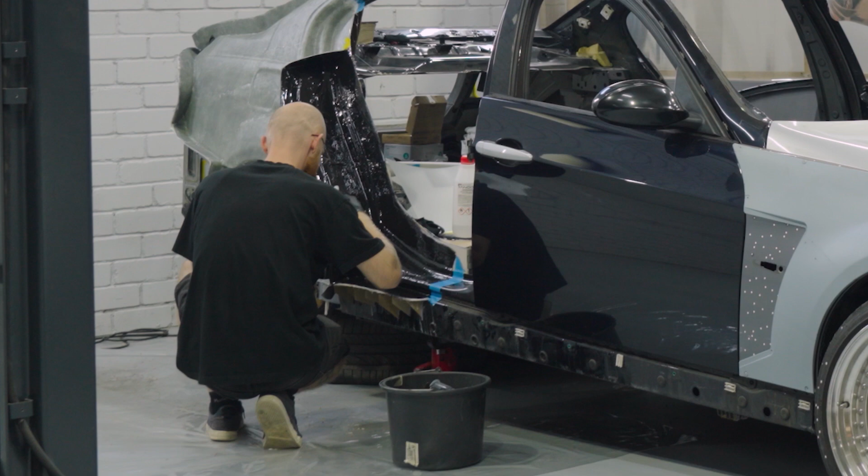Hello again. Every time when I give you an update about our E46 drift build, we talk about 3D scanners, and we are going to do that again today.

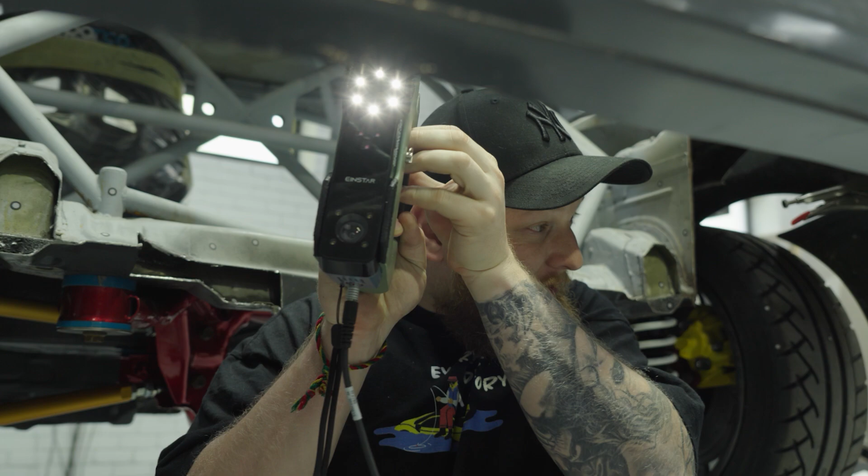But before that, I want to show you what we did before when we tried Einstar and EinScan HX, when we compared them. I told you that we are going to build the crash bars for the front end and for the rear end.

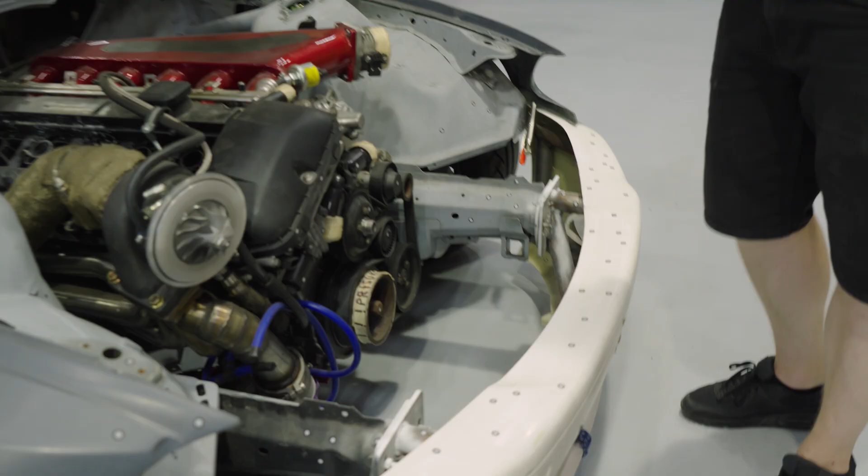We finally got the front end. Sorry, fiberglass hood is not so light as carbon fiber or Kevlar. We are not going to build from the fiberglass.

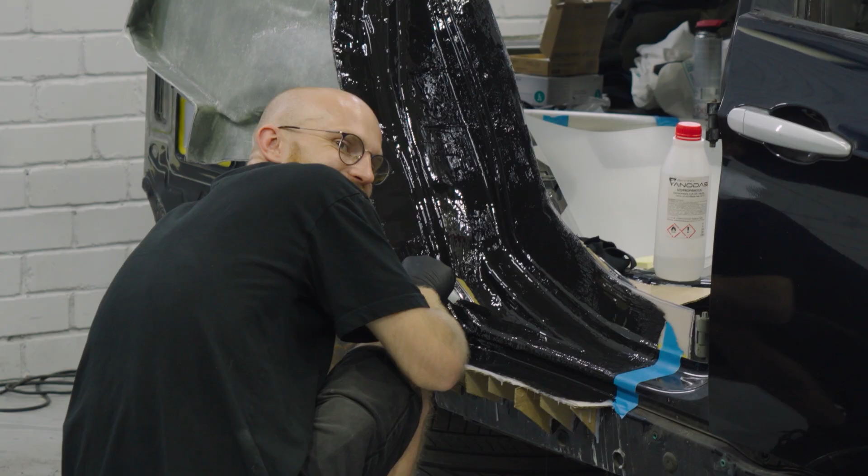So as you can see, we have the crash bar. Right now the bumper is not fixed yet. It's gonna be. We're still waiting for the brackets for the headlights, but that will come back later.

Rokas left some of his precious duct tape. It was a real pleasure to work because we saved lots of time not having to measure and do it again and again.

We just simply did whole design using CAD software. Rokas put it all together, welded it, and it fit like a glove. But this one is a simple one.

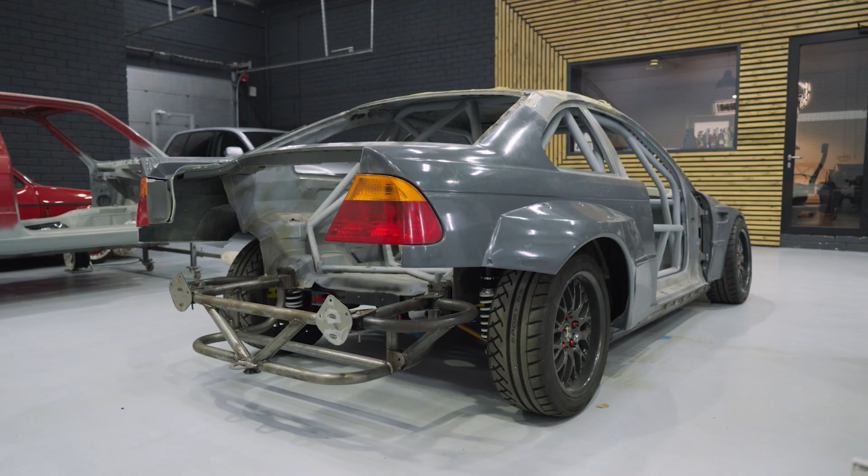Let's talk about rear end. As I mentioned, we have built the rear crash bar. We saw similar designs from other Lithuanian drifters and etc. What we're doing is nothing that we invented. We're just trying to take the ideas of what's already working and put it together.

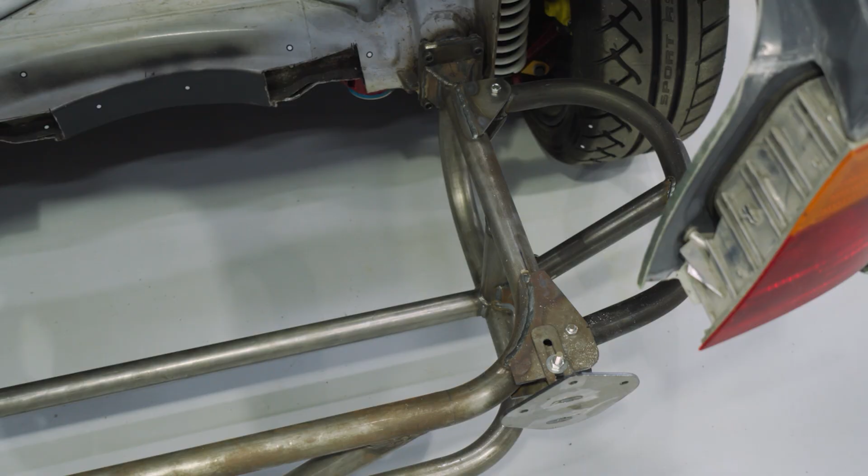So that's why we have detachable sides for the crash bar. In case you hit the wall, you can just remove them instead of the whole crash bar.

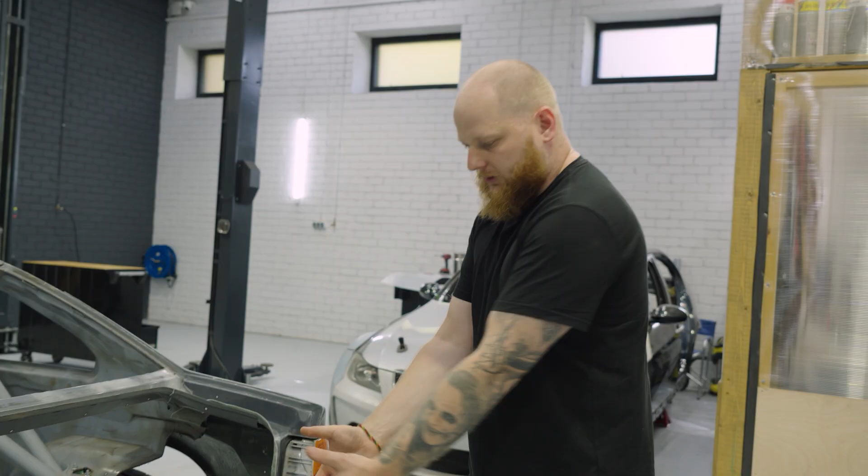Additionally, what was required for this E46, we needed to put the rear part of the rear end. We built these adjustable parts so you can change how much you want it out, depending on different fabricated fiberglass or maybe not parts. So yeah, we have this part.

What's still missing is the brackets for the fuel cell. We already have it, we scanned everything. We used CAD software to design everything. We got the measurements of the fuel cell, and it's gonna be over here.

Additionally, if you remember, we scanned the rear firewall, so the bracket for the radiator was designed. It was a special design for that specific radiator that the owner had, so we don't have to cut or adjust anything. We're just going to bolt it to the top part of the rear end and to the bottom, and that's it. So yeah, but for today there's something else what we have to do.

Let's take a look inside what we are going to build today. So can you hold the doors? Oh no, never mind, I'm just going to put them over here.

Practical, everyday, daily car should have doors like that.

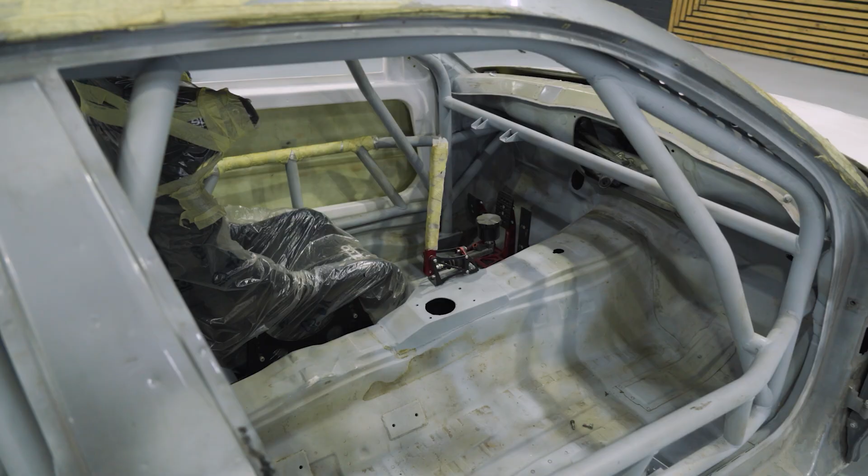What we are going to scan today is the inner tunnel of the E46. And why do we need that? Because this car is gonna use the ECU Master EMU Black ECU, PMU of ECU Master.

Additionally, it's gonna use a CAN keypad next to the seat. Nothing is gonna be attached to the dashboard, only the ADU from ECU Master. Lots of ECU Master parts gonna be used.

Today what we're gonna do is we're going to scan the tunnel, and we are going to prepare the brackets for ECU, for PMU, and for the CAN keypad.

Definitely, there are brackets available for ECU and PMU. I saw a few designs over the internet, but what we want to do is make it fit like a glove to the tunnel, so every single hole is flush, and we don't have to grind anything or prepare. We're just going to put it to the tunnel, and that's it.

Also for the CAN keypad, I'm not sure, I didn't find any. We could use some universal ones, but we don't want to do that. We want to make it flush and sit properly and tight, so when you're drifting it's not gonna go anywhere.

But before we start with scanning, let's take a look what we got today. As you remember, we are huge 3D scanner users, everyday users, and I mentioned that multiple times today. You know that we have our Einstar scanner.

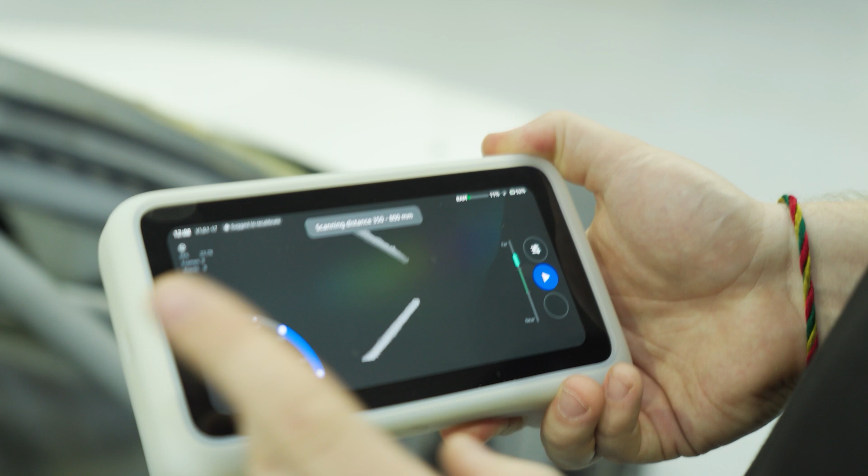I'm going to start with Vega. I'm not going to calibrate texture right now because we don't need that. It's definitely more usable for digital use cases, but since we need geometry, I'm not going to use that. What I'm going to do is select the distance between 350 and 600, so it doesn't get too much data that I don't need, like the roll cage, etc. In that case, it's better to track, and the scanner doesn't have to think so much about where to track.

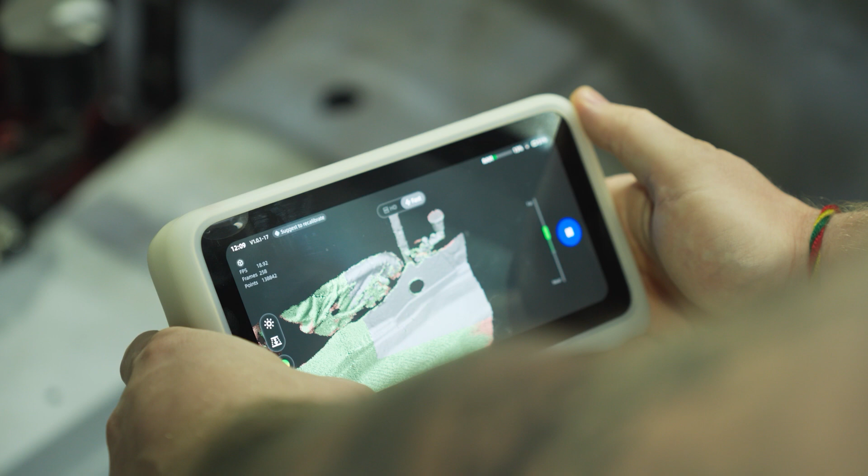So let's try. As you can see, it's quite easy to scan, and it's easy to see the quality. The green part shows me and indicates that there is more than enough scan data to create the mesh, and the tracking is quite good.

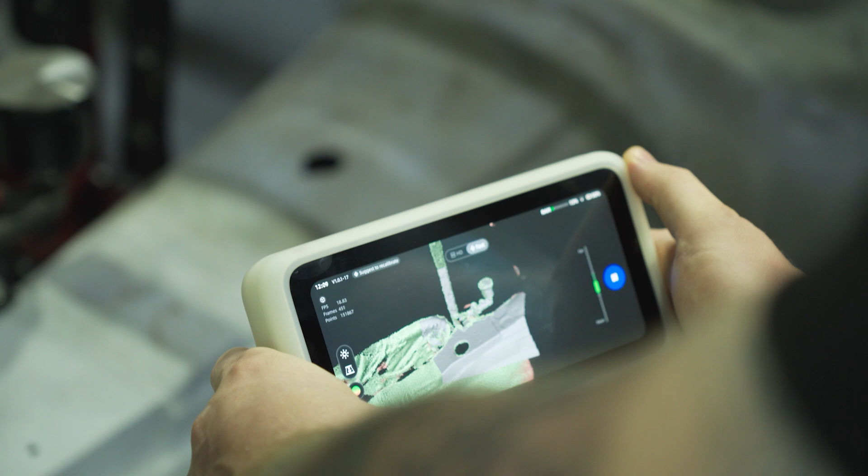I'm definitely going to scan more than I need, just to try it, because the tunnel part is more than enough for our project. But when you have something new, you always want to try and see the possibilities. Also, we want to compare with the Miraco to see the differences in scanning between both of them.

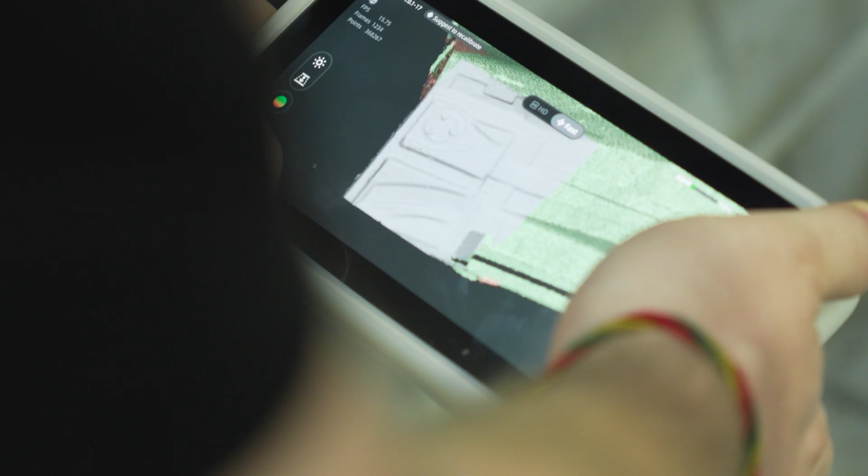Working with an all-in-one scanner is definitely easier than working with a tethered one that requires a PC or Mac, because now I can simply look at the LCD and that's it, and work. It helps to save time.

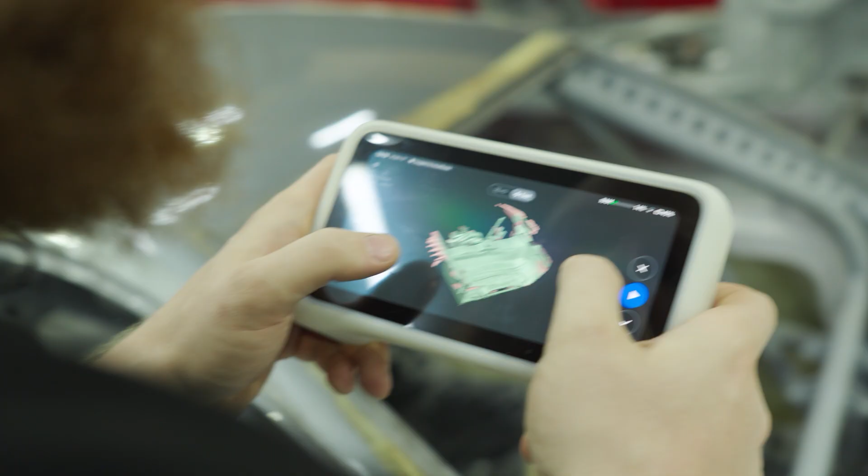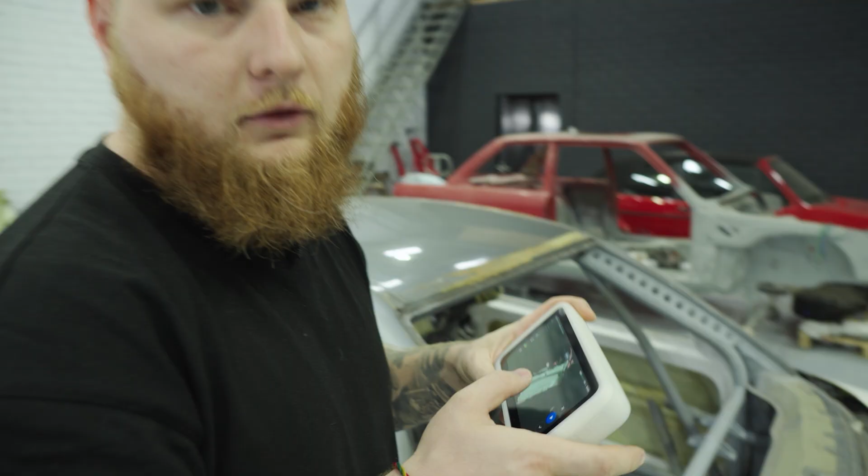Okay, I think that's enough data. As you can see, the green parts are what we are going to use. I can scan additionally on the other side if needed. What do you think, should I? I think I can do that off camera without you, because you're standing and interfering with me while I'm scanning. I'll continue without you.

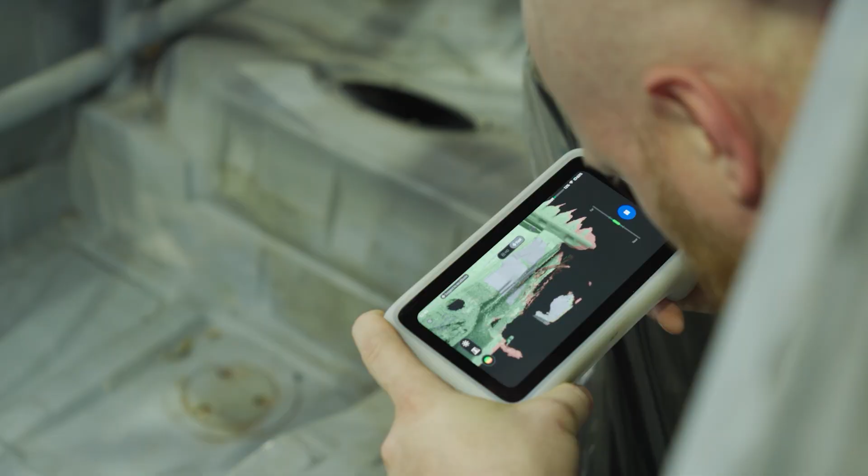Okay, now I have enough data and I'm happy because I have both sides and the engineer can work on it. I can press finish. It's going to finish the scan.

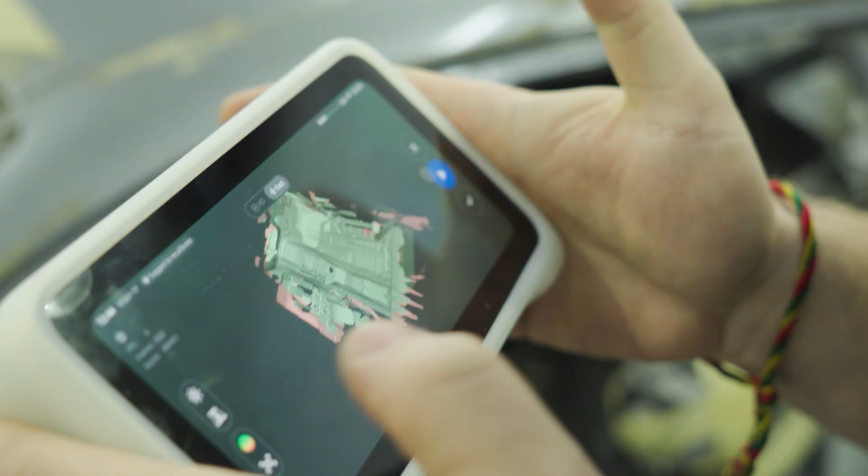I still need to get used to this because I'm always editing the scans on the Mac, but you can do that here. It's definitely easier to work on PC because you have your mouse and your huge monitor. But still, before the meshing, you can simply remove some garbage. I'm not a big fan of playing with small screens - I prefer bigger ones. Big screens, big engines, and big power.

Okay, I pressed complete, so it's going to remove the data that I wanted to remove. So we got our scan edited. It still has some floating stuff, but I'm not going to mess around with it. I'm going to use one-click mesh, it's faster. I definitely can choose my own parameters for the mesh, but let's give it a try for fast reconstruction.

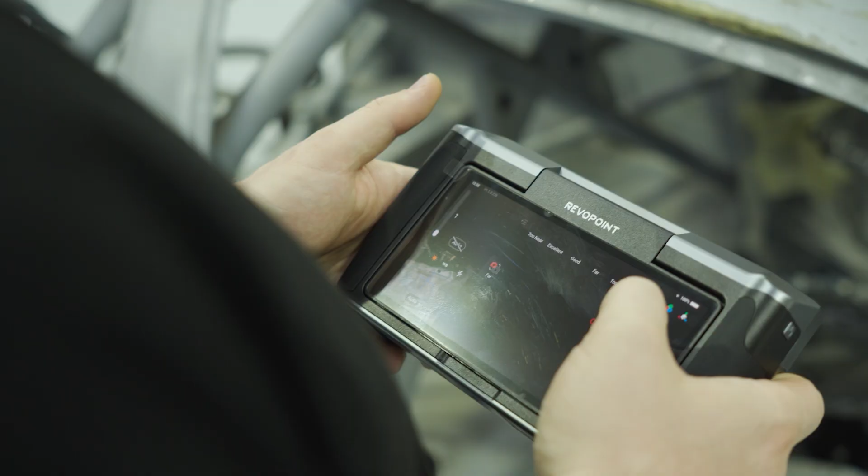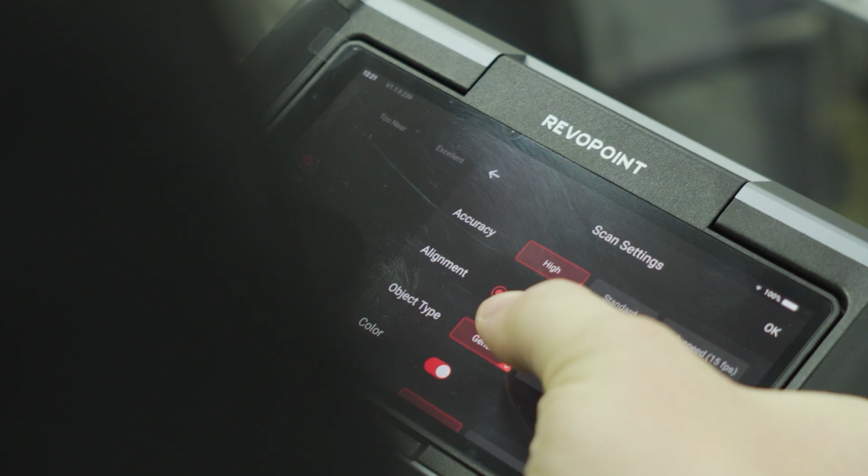Now, while the mesh is being generated, I'm going to take the Miracle and we'll see how it compares when we're talking about the scanning. I'll try to use the same setup, same distance, 250. I hate sliders like that because I have huge fingers, so it's hard for me to play with them and it's a bit laggy. Come on, you can do it. Oh, 51, 51. Far mode, auto here. I want to close it, and I'm going to disable texture also - align by feature, general type, no color please. Okay, let's give it a shot.

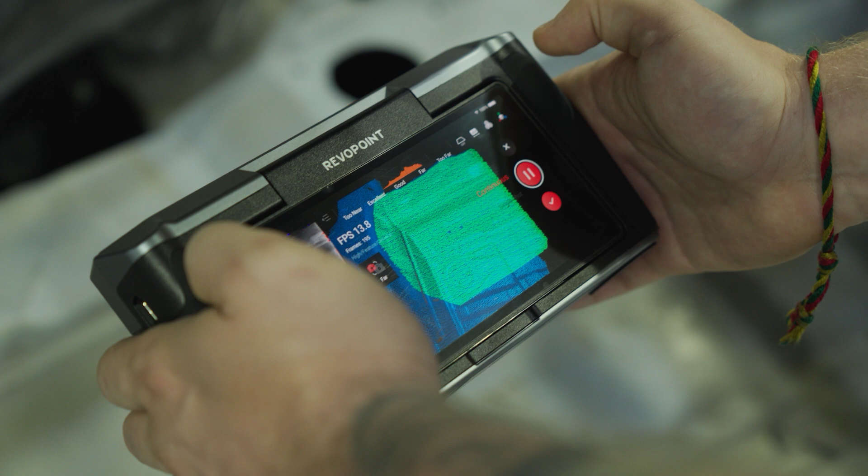What I'm already missing is a data quality indicator. I think you can understand if you have enough data, if it's more blue or less blue, but it's more convenient to have red and green indication, so you can try again.

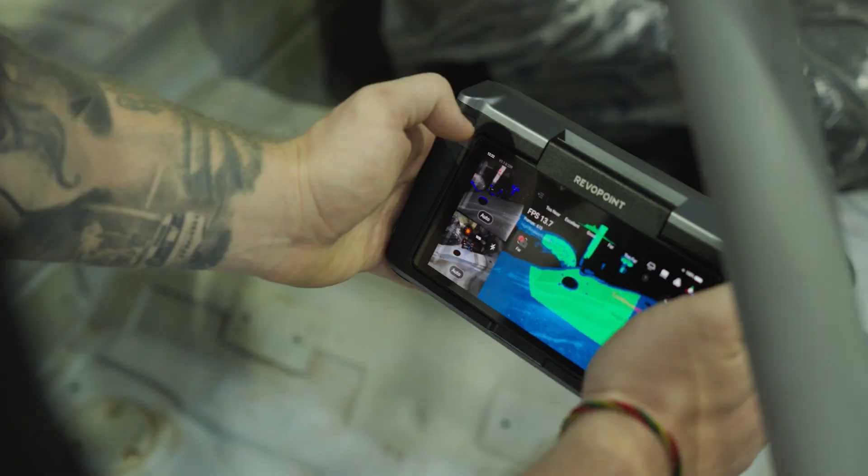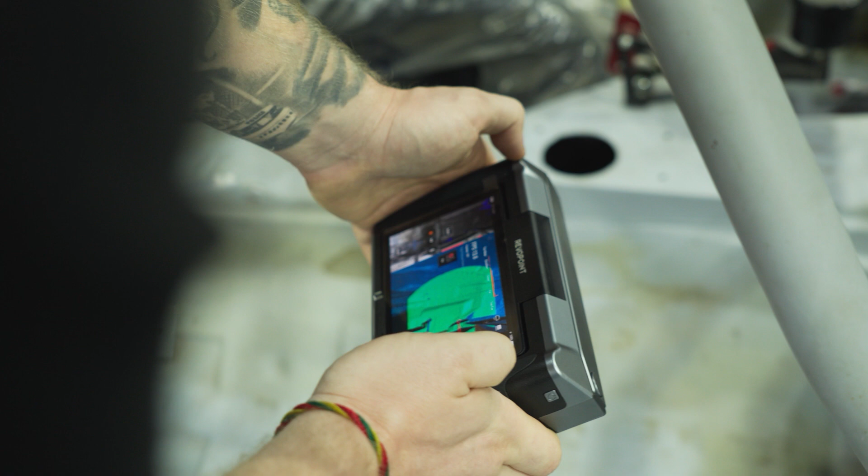It definitely has some trouble capturing black objects, because the handbrake is still uncaptured. As you can see, it gets some parts and that's it. We'll see how it does in the darker spots. But yeah, I'm really missing the data quality indicator. I don't know, should I scan more or not?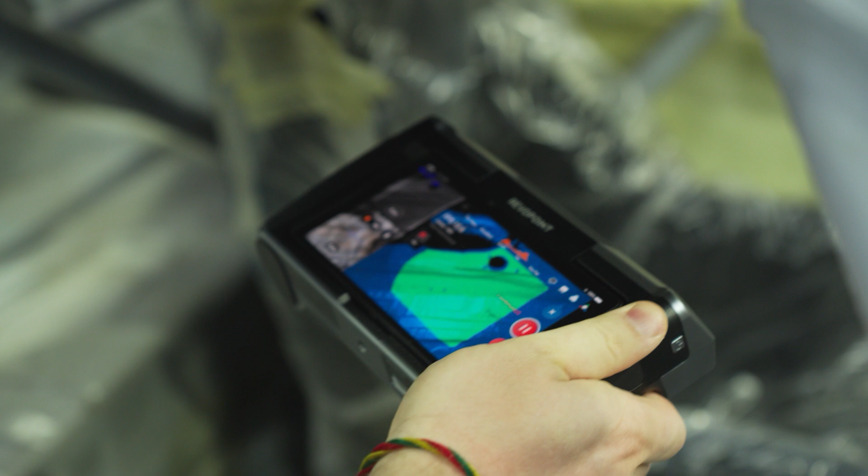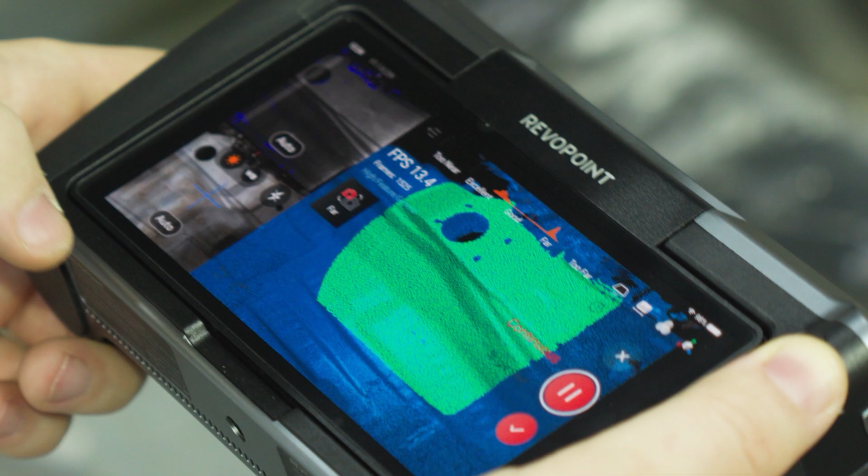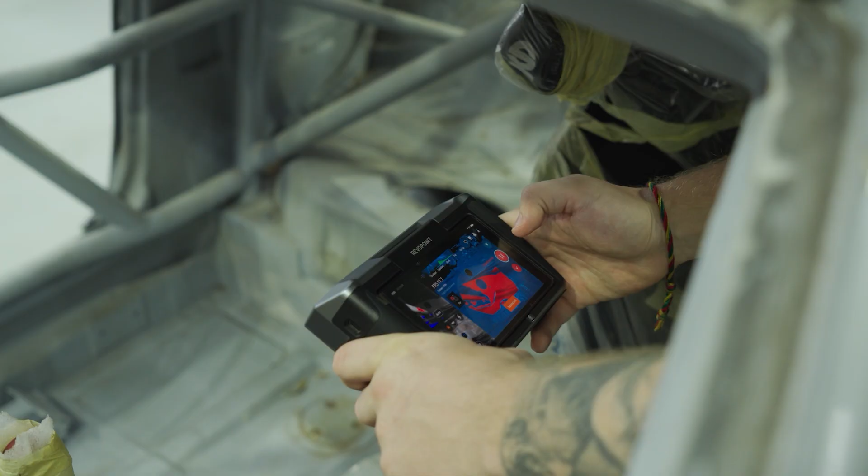This feature bothers me a lot on the Miraco. I wish for the Miraco users that we're going to get one. And I think it lost track at some point because the holes are not aligned anymore. Oh, it got back. I want to pause and we'll try to continue on the other side so I can capture the tunnel more. We'll see if it's going to get the tracking or not. Tracking lost. Oh, okay, it got it.

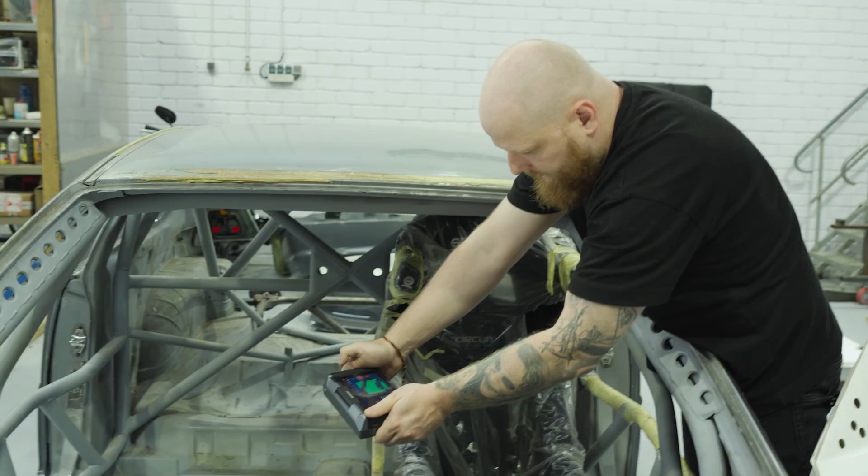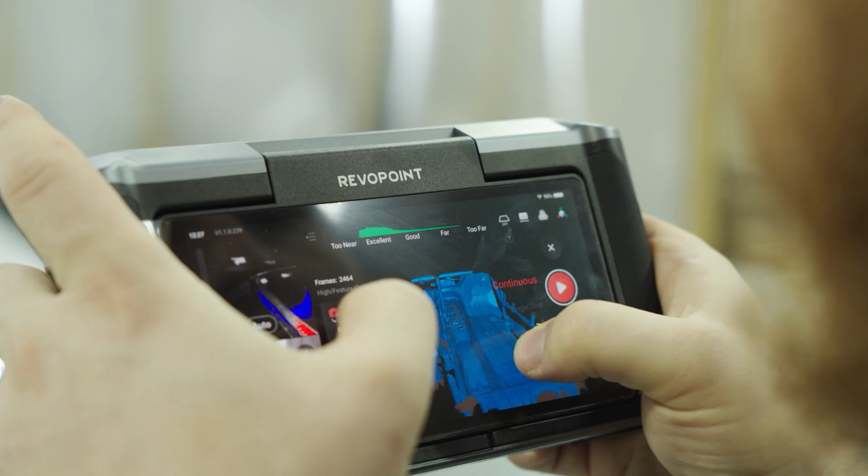I think that's enough, let's take a look. It seems that they had some problems scanning this part. That's what I was talking about when I was saying it would be great to have a data quality indicator, because without stopping I was not able to see what kind of holes it has. So yeah, let's say it's enough - we can finish the scan.

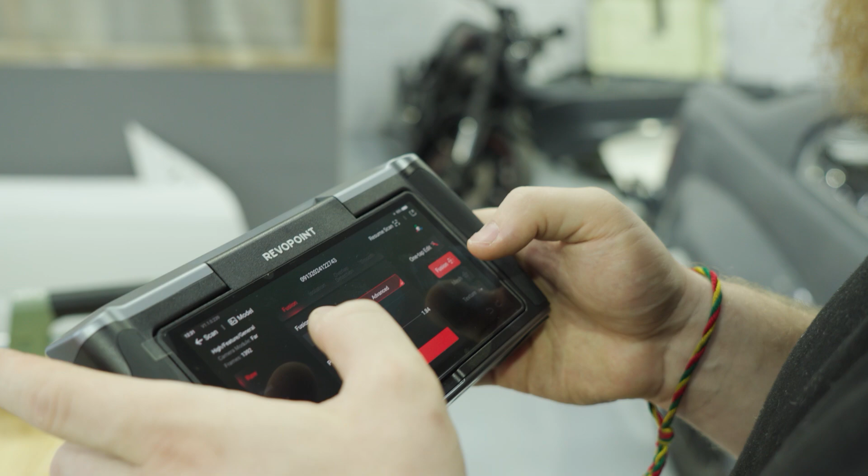And now I'm going to mesh it and use one tap edit, I think. Oh sorry, I have to fuse it. Okay, I definitely see some garbage which I can remove, I think, but it's not easy to do on these scanners. Everything else is okay - let's do a mesh.

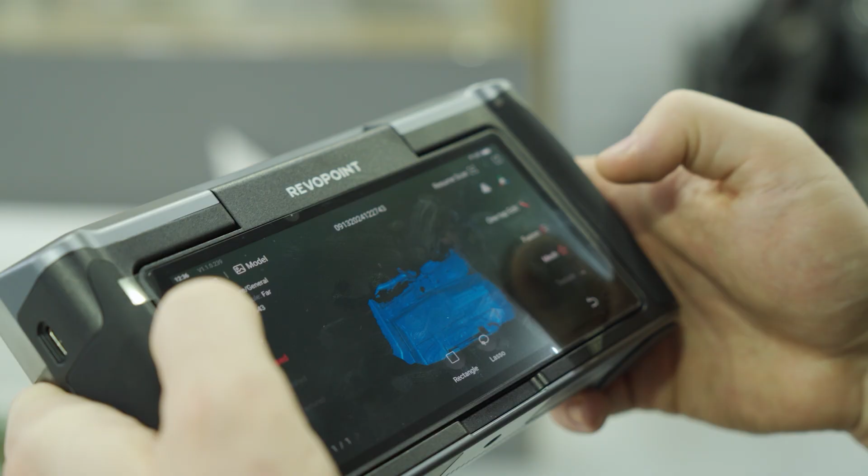I think I'm gonna just do one tap edit, and it's gonna choose the best parameters on Vega. It's gonna be easier. Now we can connect both of them to PC to inspect the scans and send them to our engineer so he can produce the parts that we need.

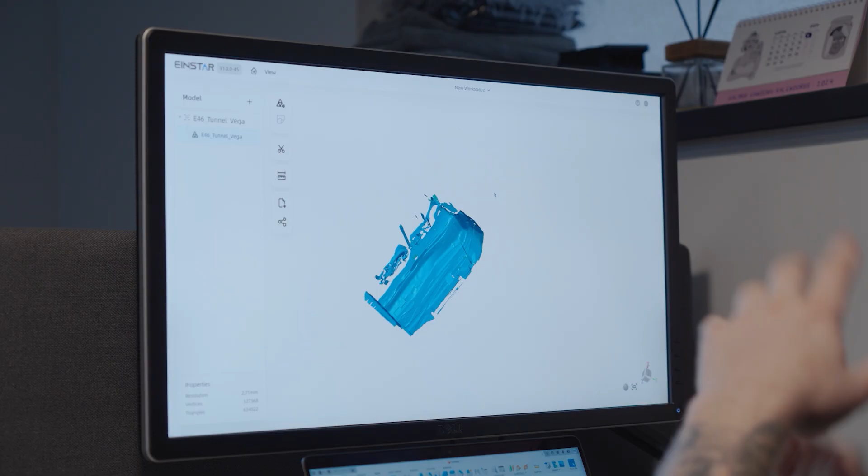Now I got both scans on the Mac. I'm gonna use the new Einstar software called StarVision. I'm not sure if we're gonna release it for the regular Einstar, but for now it's only for Vega. And I have RevoScan software for the Revo to inspect what I got with the Miraco. From the first look, both scans look quite similar.

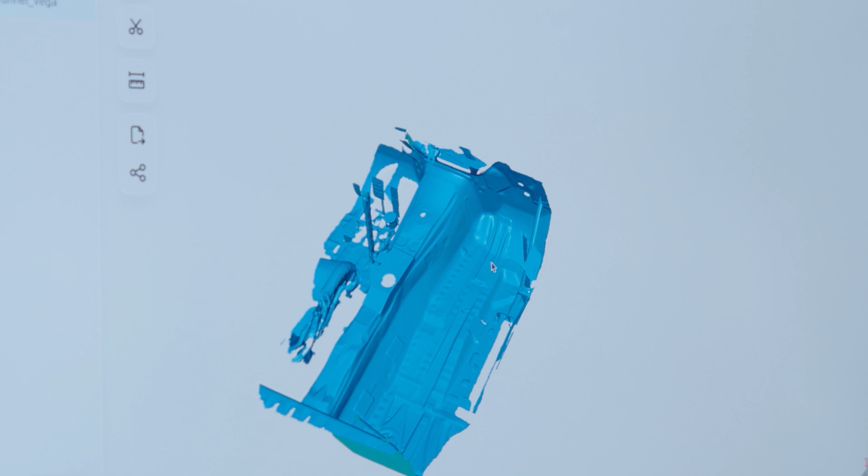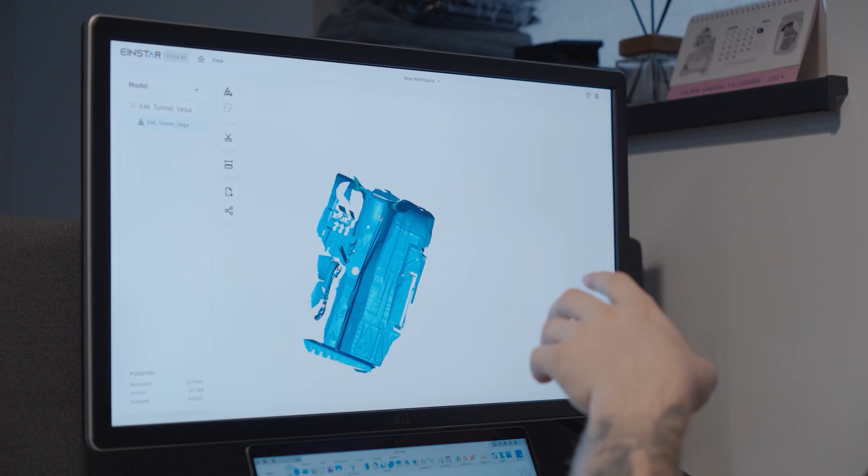You can see lots of details on both scans, but I can definitely tell that Vega had better time capturing dark objects, especially with the handbrake. You can definitely see less detail from the handbrake, but overall I wasn't concentrating on the sides of the scan too much or at the pedals—my main goal was to scan the tunnel because we're going to build the parts for it.

I saw that RevoPoint had some troubles over here, some garbage, and from the mesh data it seems that it left a little bit of something over here. I don't know how much that changes the accuracy, but overall you could work on that.

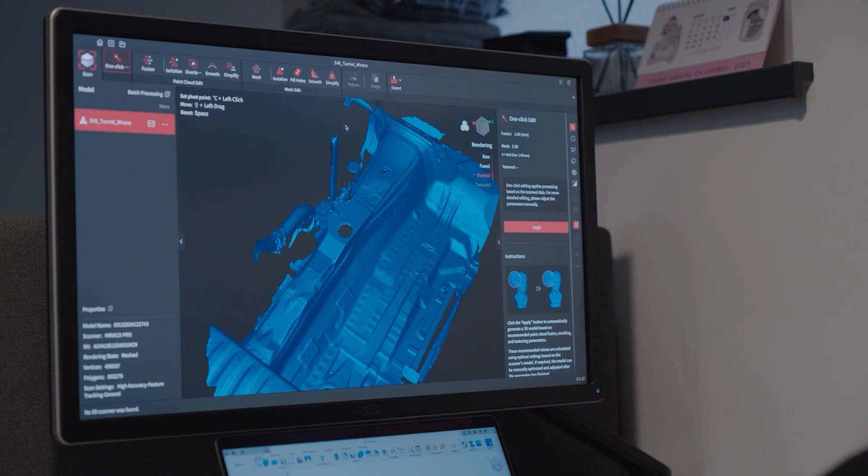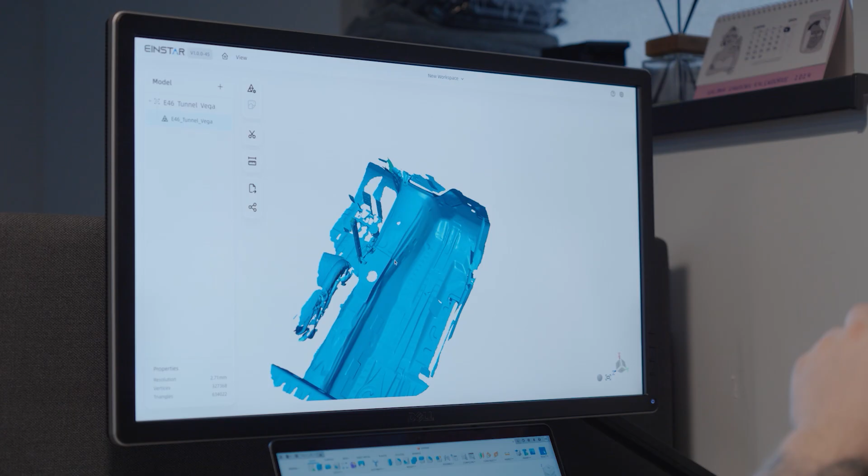I think it depends on the settings you use to get the scan, but working with Vega was definitely faster because the tracking was better and the frames per second were bigger. I know maybe the frames per second were similar—I didn't watch the exact numbers—but the feel and the latency between frames was a bit higher for Miraco.

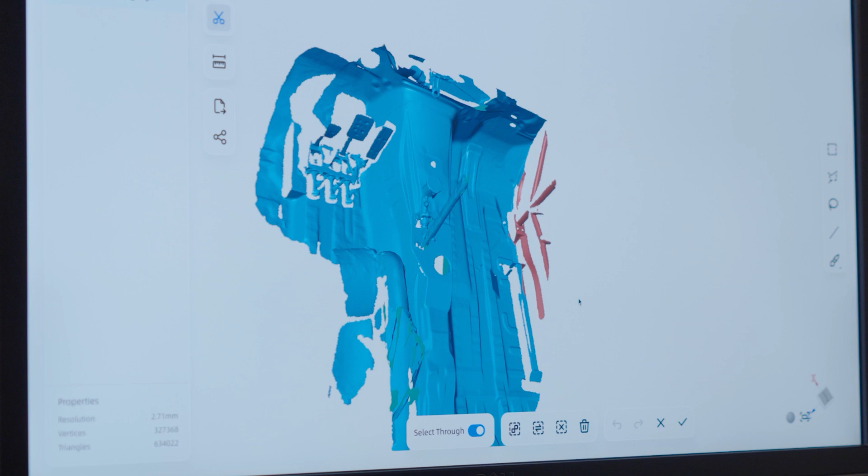I'm going to edit both scans a little bit and remove some data that I don't need. Like I said, it's definitely easier to do on the PC, as you can see, because I have a trackpad, a keyboard, etc. So I can work faster and more efficiently than on the screen. But if you don't have a PC or Mac with enough resources for your work, you can definitely do everything on your scanner and use it for post-processing rather than a dedicated machine.

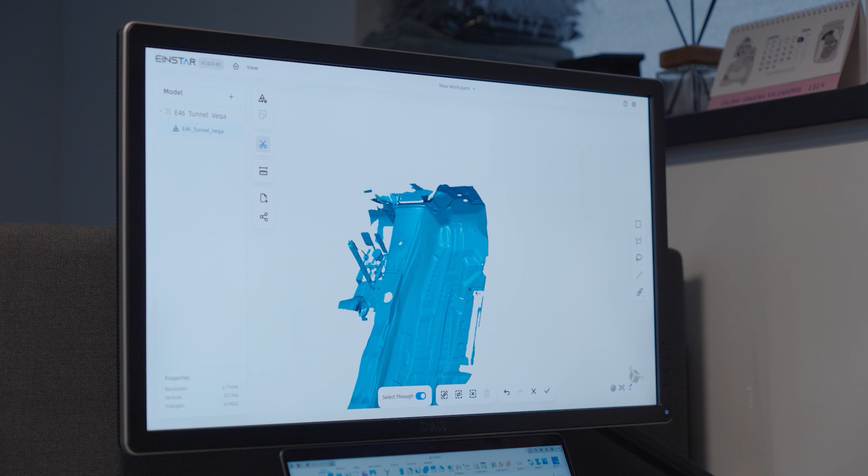Is it easier to do on a dedicated machine? Yeah. Is it doable on the scanner? Also yeah. So you choose for yourself depending on your application.

I'm not gonna show you how I prepare the whole scan and clean it, because I don't think this is something you want to see. But I will do that off camera. I will send it to our engineer to work with this data so he can prepare the parts that we need, and we can print it.

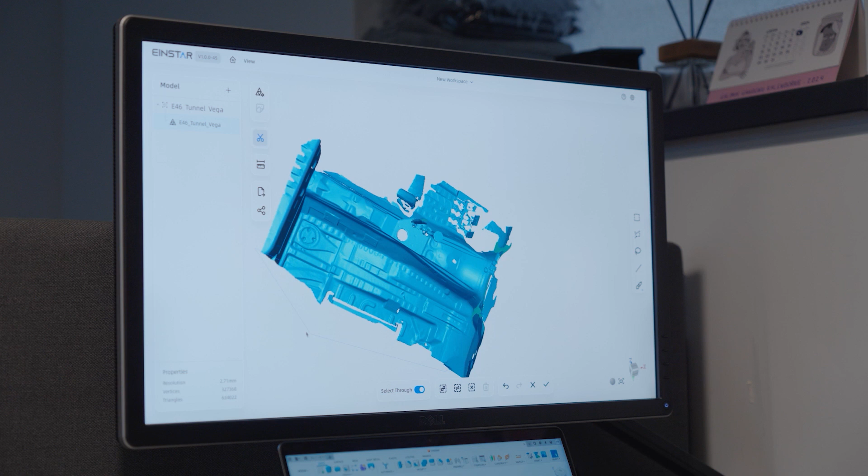It depends on how fast he's gonna do it. If he does it today, we will print it overnight and you will see the result tomorrow. So, see you next day. We got the next day.

We just tried our bracket. We printed two versions overnight. This is the first version—it was a little bit too small. We used the CAD file from the official ECUMaster website, and something was wrong. Maybe it would have been better to just 3D scan it and get better measurements.

But we thought, what's the point? There's a CAD file, we can use that. Wrong. So this one's going to the trash or on the wall, and the second one you can take a look at.

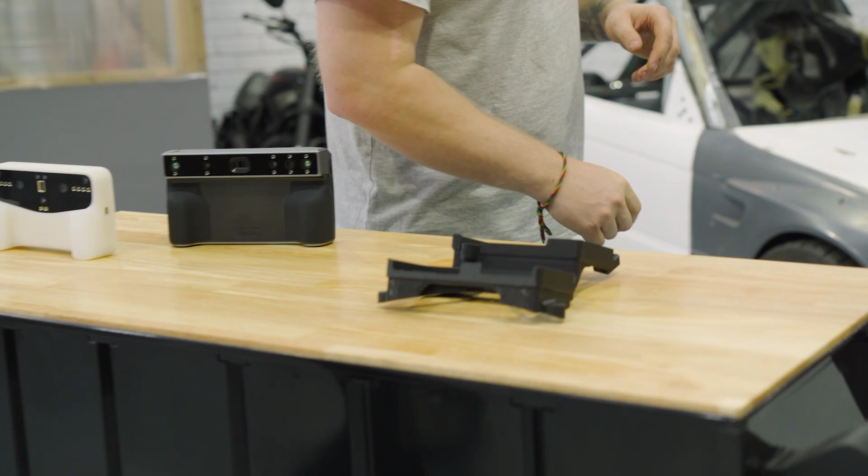As you can see, because of the 3D scan, the bracket fits like a glove—no wobbling, nothing. It just stays in place where it should be, and I'm really happy about that.

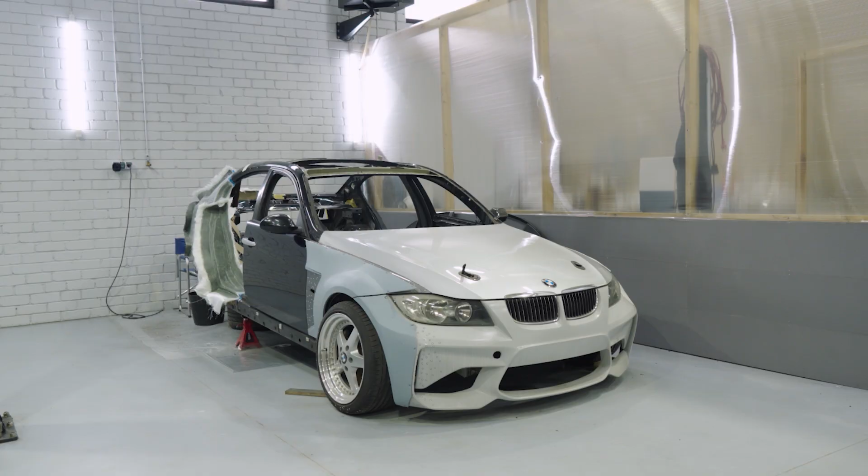So we can 3D print it from, I don't know, PA nylon 12, or do the mold and make it from carbon fiber. I don't know—Totwe won't be happy because of the E90 waiting for the body kit. So we'll see, but for now I think the bracket from nylon is gonna be perfect at the start.

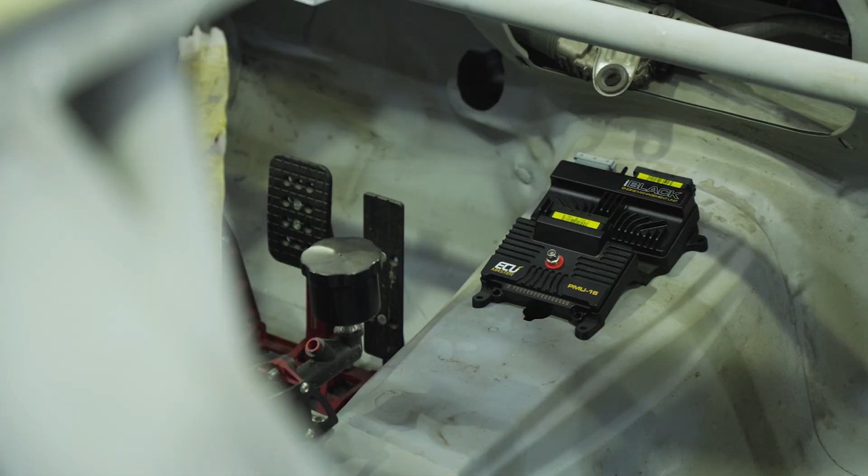Right now our keypad holder is printing, so I'm not able to show you that, and Svai is pushing me to release the video as soon as possible, because he doesn't want to work on the video for 2 nights. He just wants to spend 1 night.

That's why I'm not able to show you the second part, but that's going to be available on our eShop at some point. You'll see that later when you watch the episodes of this E46, when we start it. Right now, what we're going to do is put everything together. We're still waiting for the headlight brackets, so we can work on the wiring.

We need to design and prepare what kind of wires and where we need them. We have pretty much all the components written down in the Google Sheet, so I can go through it and make sure that all of the components have their own connection. I think at the end of the E46 series I will do a wrap-up of how we started, how we prepared the plan for the project, and how we execute that.

Definitely, this project was already prepared. It had some mistakes that we had to fix. The planning was a little bit of a mess, but at the end of the day, like we talked with the owner, for the next season it's going to be a bomb.